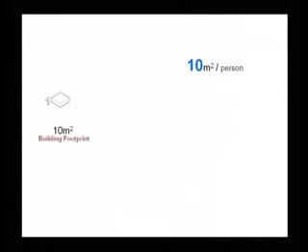So now to this must be added the built-up space which the apartment needs. Supposing we take a middle-class apartment in Bombay, the average would be 500 square feet. I'm not talking about low income. It would come to about 10 square meters per person. So here we have 10 square meters in the building, and then we've got 10 square meters of open space.

And together that comes to 20 meters, and that means an average of 20. Now, if I add another floor, the footprint of the building stays the same, but the amenities go up to 20 and the average comes to 15.

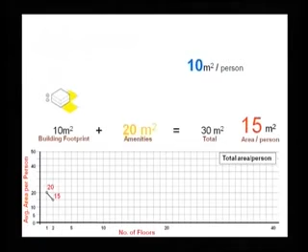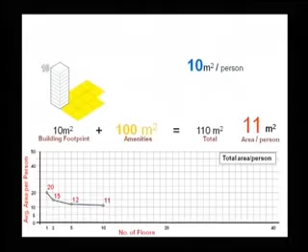And then when I go to the next one, it goes to 5 floors, let's say. I would then have 10 again, and then 15, and then 50, and then you get 12. So we're beginning to save on land, but it's beginning to taper off. When I go to 10 floors, I've come down to 11 meters. And then after that, it goes pretty flat all the way up to 20 floors and then to 40 floors.

So this idea that I'm saving land only works when I'm looking at the building footprint, not when I look at the other infrastructure needed, which is, I think, what Anthony Wood was referring to. It's not just water supply, it's also amenities, it's also open area.

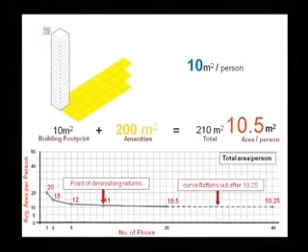You can see there the two things I mentioned, that at 11 meters it's a little, about 10.5, it flattens out, and it doesn't matter how high you go after that. If you give the amenities, you're not going to put more people in that area. The only way to get more people in, which is the way we do it, is that we don't give them the amenities. We just pack the whole place with buildings. The other thing you notice here is that at 10 stories, it begins to flatten out. Beyond that, you're not gaining for this particular area of apartment.

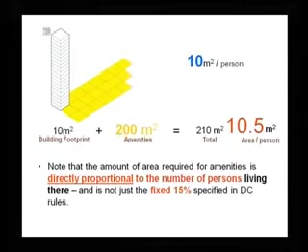Now, the other thing I would like to point out, is that the amount of amenities is directly proportional to the number of persons. It is not 15% as stipulated by the municipality. That's a ridiculous rule, and it worked when we had 2-story and 3-story development across Indian cities. Today, people build 20 stories and then they put 15% for the open area. That's ridiculous. In any country, in any city around the world, it's directed to the number of people, the density you're creating. And we could do that here.

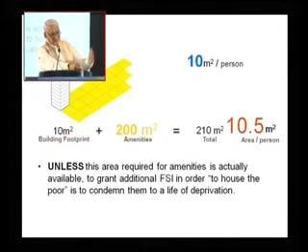So to say that you give me more FSI and I'll house more people is too simplistic, actually. I know the intentions are good, but if you look at this, you realize it's not going to happen unless you condemn them to a life of deprivation for the next 50 years, the next 100 years, as long as these buildings last. That's the kind of city Bombay will become.

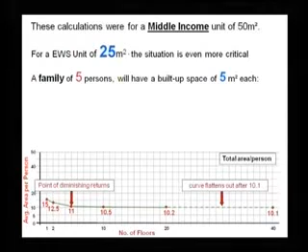Now, these calculations were for middle income units. If I go to the units for what is called economically weaker sections, EWS by the government, which is 25 meters per family, which is 5 meters per head, the numbers actually start flattening out much, much earlier. And so at about 5 stories, I really don't get more density.

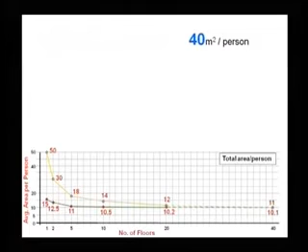If I go in for the luxury flats, now here it makes sense. You start at 40 meters in a flat of 200 meters. That's 2,000 square feet, which is a typical Nepean Sea Road flat, Malabar Hill flat, and a luxury apartment. But even that flattens out at about 20 stories, and you don't really gain. But interestingly, it flattens out at the same number, which is what you chose for amenities. So what you choose for amenities is the crucial issue, how much that should be.

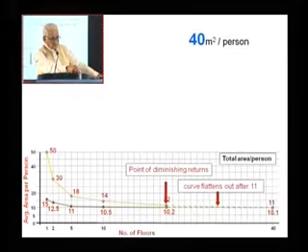So the key thing is not how high we can build, but it's got to do with the amenities we provide. So can we cut down on schools? Maybe we could, but this is a problem for educators. Can we cut down on hospitals, or can we use hospitals more efficiently? Again, this is a problem for hospital administrators and doctors, and we should have conferences about that.

It's crucial. For instance, if you could stop playing cricket and start playing squash, or stop playing squash and start playing carom, or whatever, just run in a single place, maybe you'd get much more. You have to think of that. Can you use schools 2 or 3 times over? But just thinking, unless you look at the amenities, you are not actually looking at housing. You're just looking at piling rooms one over the other.

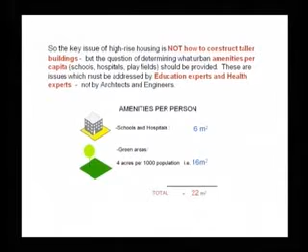So this thing which I showed you at the beginning is the key to it. And I would really hope that during these 3 days, even if you don't discuss this, you set up, CTBUH should set up another conference which asks these people to come in, and who knows what inventive ideas could come out of really playing fields that could be stacked, for instance, in some way, multi-level. Who knows? We don't know. We've never tried it. But this is actually where you would get higher density.

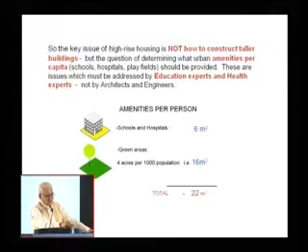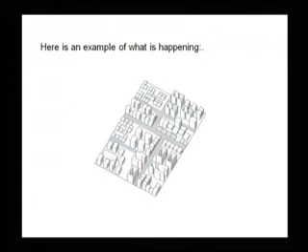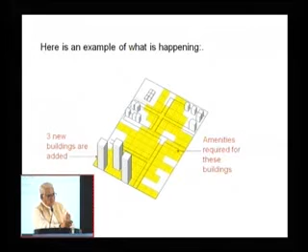Now I'll tell you what actually happens nowadays, what is happening to our city. If this is a typical area of the city, we add 3 buildings, there they go. And with those 3 buildings comes the amenity space which should have been provided. Instead, and that isn't the responsibility of the developers, that is the responsibility of the authorities. They should not give permission unless they know that space has been guaranteed. But instead, after the buildings are built, the rest of the space is then filled up with more buildings. That's the way Bombay is developing.

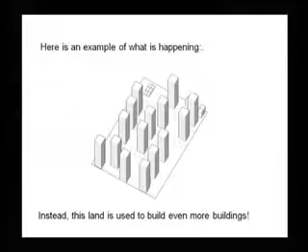So it seems to me that because of the crucial importance of amenities in residential areas, in most cities around the world the high-rise buildings are in the offices. This is true of Australia, it's true of America. Except for European cities where people continue to live in the center of the city, which I will show you. Whereas in these cities, the high-rise buildings are in offices and the families continue to live in low-rise and medium-rise housing.

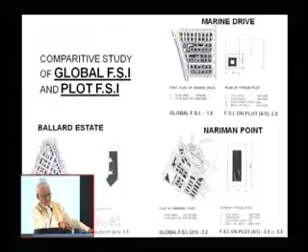If I take, for instance, Marine Drive - all of you know Marine Drive, and I hope the visitors too have seen it. It's a lovely set of buildings along the water, along Back Bay. Every building has got a 20-foot setback all around, and it's about 6 stories high. So you get actually... oh gosh, I've gone back on that.

What you get is an FSI of about 2.5 or so on the building, about 1.8 or so in the global - that means in the whole thing, including roads.

If I take Ballard Estate, it's far more intelligent. Ballard Estate has got no setback for each building - it goes straight up from the ground, just like we have in Jaipur, in many cities, in Chandni Chowk, in most European cities. You can go straight up. So although you're only going 4 or 5 floors, you are getting an FSI of 4 or 5.

Because it depends on whether you have a little chowk, a little courtyard in the center. And the global FSI is very high because the streets actually double as parking, so you don't really lose on the streets.

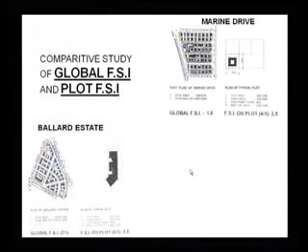Now, if I compare that to Nariman Point - there you have really tall buildings and setbacks. So here again the FSI is 4.5, but the global FSI is the same as Ballard Estate. And there's no comparison about the living and working conditions, because in Ballard Estate, which is from the 1920s, you've actually got people - you can find a parking place reasonably near the building you're going to, because the cars are spread out as opposed to one big parking lot.

So I would think one of the changes we should look at - we want higher density, we want more intense use of land, but we have to realize it's got to do with building footprint, not just about going tall.

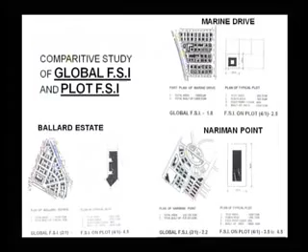So I think I would end by saying that, first of all, I agree with Anthony - I want development, and I want intense and intensive use of land. But it's not just a simplistic thing of saying let's build higher. I think cities and their buildings are an intricate mix of conflicting entities. To build sustainable cities - and that's a very important word, if you really mean that word in this conference - we must understand this and optimize all the parameters, not just one.

And in this process, I think we will not only have to increase the infrastructure, I agree, but I think we should differentiate in the DC rules, the development control rules, between what is applicable to office buildings and what are the requirements, and what is applicable to residential buildings. Thank you.